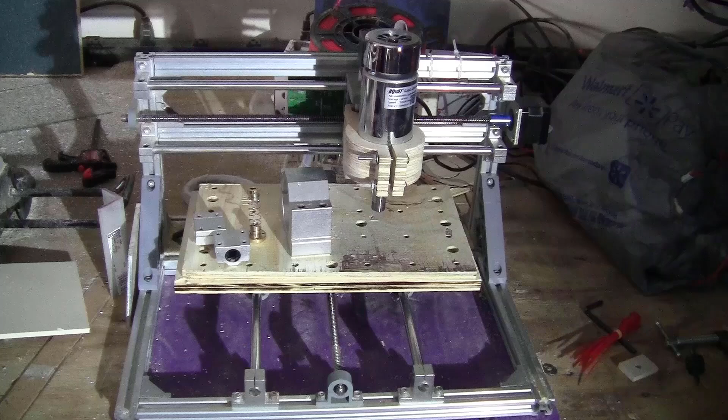Okay guys, so in my last video I showed you how to upgrade the spindle on your 3018 CNC by making this type of a holder, which you can mill out on this CNC machine itself using the original spindle. And I think that the solution is as good or even better compared to any other 3D printed solution out there. Today I will show you another way to do it.

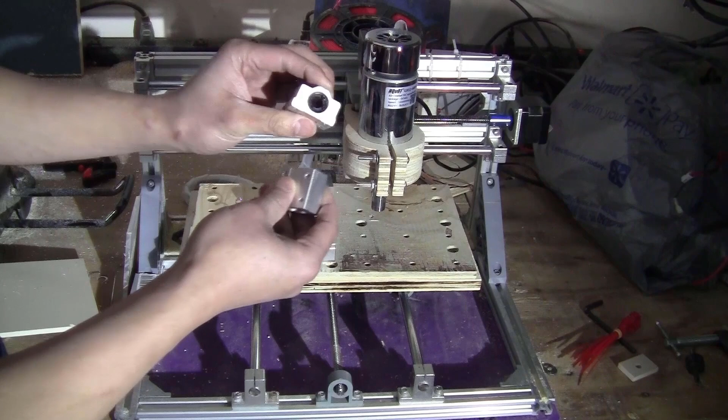It will be a lot more sturdy because everything will be made out of aluminum, but it also requires more work and also tools and materials. So what you need is just this type of spindle clamp, which comes with the spindle when you buy it. Two of these bearing blocks, SC8UU, which you will have to trim a bit later. I will show you why and how.

And this type of anti-backlash nut, T8. You will have to pay attention when you buy this type of nut for the 3018 CNC. The 3018 CNC machine uses this lead screw, which has 8mm diameter and 4mm lead. So you will have to buy the corresponding nuts for it. That is very important. If not, it doesn't fit.

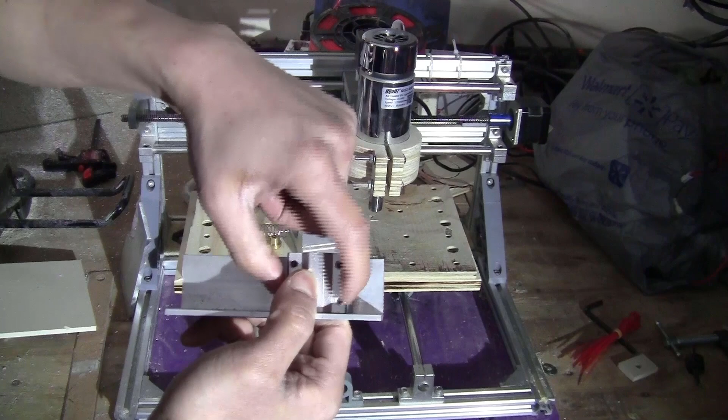And you will need also some aluminum plate, maybe 6mm thick or less. Not too thin though, because if you want it to be sturdy, keep it about 5 or 6mm. One piece of aluminum angle like this. Just make sure that the side of this is large enough to cover all the 4 holes on the linear bearing. I will show you why later.

So now let me just show you quickly my design for the setup on the computer, and I will change this back to the original spindle just to make sure that you can do it even with your original setup of the 3018 CNC machine.

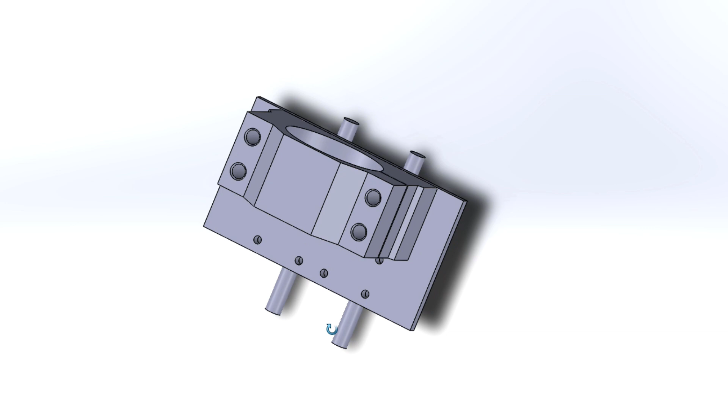Okay guys, so let's just take a quick look at the spindle holder setup. You will have the original spindle clamp here, attached on this plate, made out of aluminum, using the M6 bolt that comes with the spindle clamp. And this aluminum plate will be attached on the linear bearing block through the holes, using some M4 bolts.

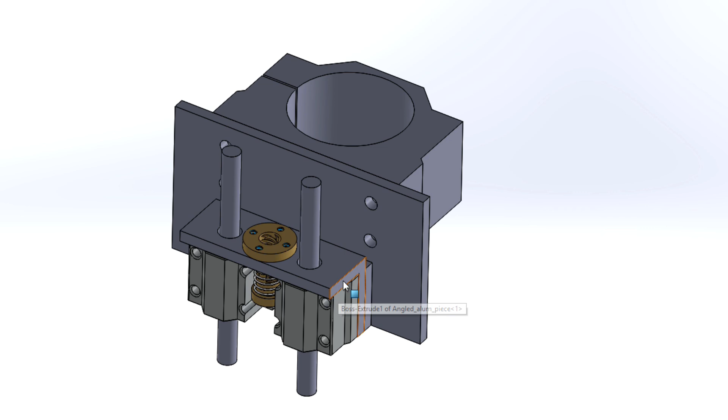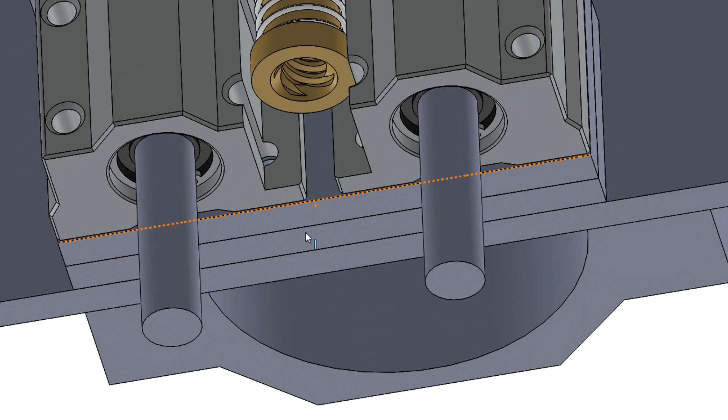And here is the angle aluminum piece that I showed you earlier. On one side you have the holes here to attach the anti-backlash nut using some M3 bolts, and on this side it will be bolted to the linear bearing blocks. And for this nut to fit inside the setup like this, I will need to trim off some part of the linear bearing block here. To do this, I'm going to use any type of saw, like a Dremel tool, angle grinder, whatever you have and feel comfortable using.

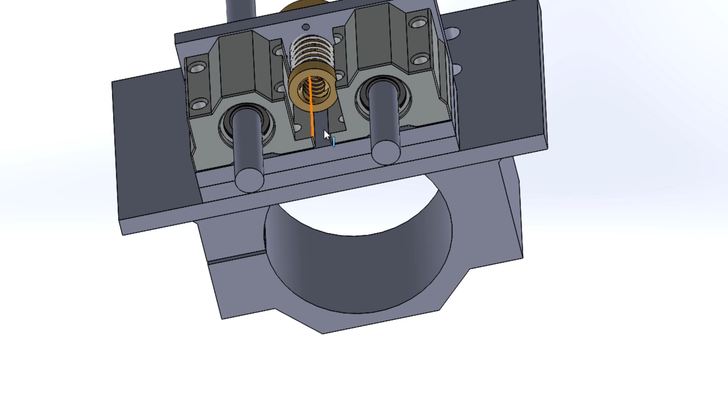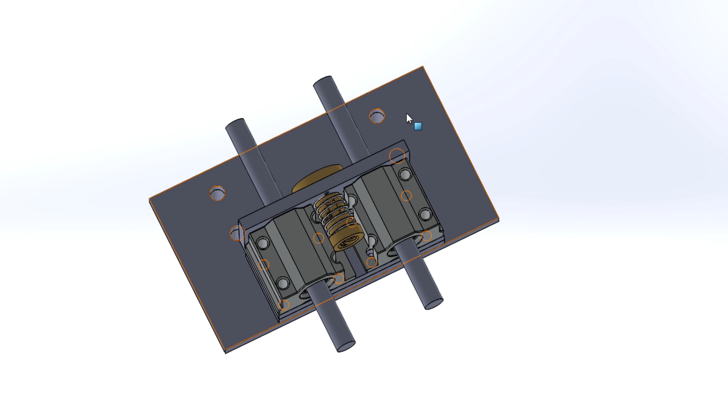And this rail here is the original rail on the Z-axis, so the space here is very limited; that's why I need to trim this off. And I won't be making the aluminum pieces on the 3018 CNC because I don't think the original spindle is powerful enough and the machine sturdy enough. So what I'm going to do is make some drill guides using plywood on the 3018 CNC, then attach them on the aluminum pieces, and then use a drill, or a drill press would be ideal, to drill the holes using the corresponding diameter drill bit. So let's just get to it.

I don't think I need to show you much on setting up the CAM because it's really easy. You only need to pre-drill all the holes with some small bit. For me, I will use a 2mm bit because the holes here need to be 2mm. So I'm going to use the same bit for all the holes, and then I'm going to use the 3mm flat end mill to cut the pieces out from the stock.

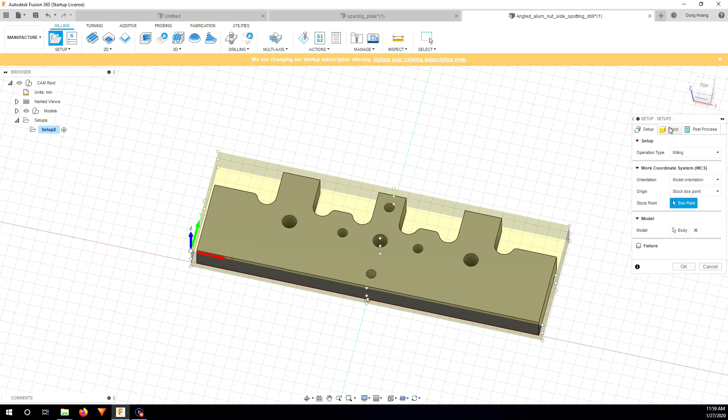Okay, so now I'm going to go to manufacture, create a setup, choose the reference point here. Stock, I'm going to put 10mm on the side and 0 on top. But I think I'm going to use 6mm thick, and here the model is only 5mm, so I put 1mm offset at the bottom and then click OK. And now just click on drill and then select the tool. Here I can choose any tool because on the machine I'm going to use the 2mm bit. So I just click on a random bit here, 3mm flat end mill.

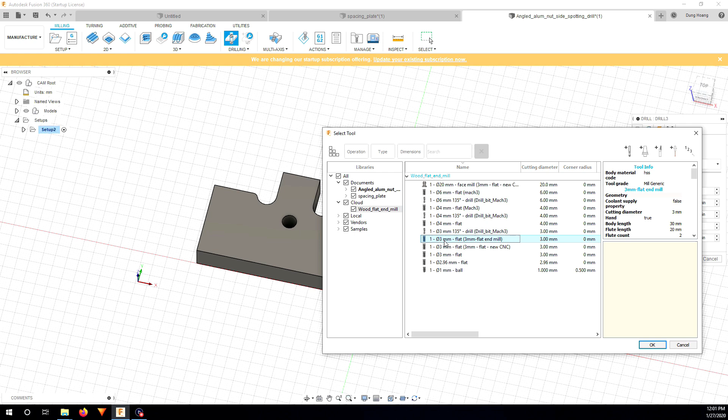Okay, and here I put probably 3000 RPM so it doesn't burn the wood. And here I put 100 plunge rate and maybe 200 retract feed rate, and disable this. And here I'm going to choose all the faces of the holes that I'm going to drill.

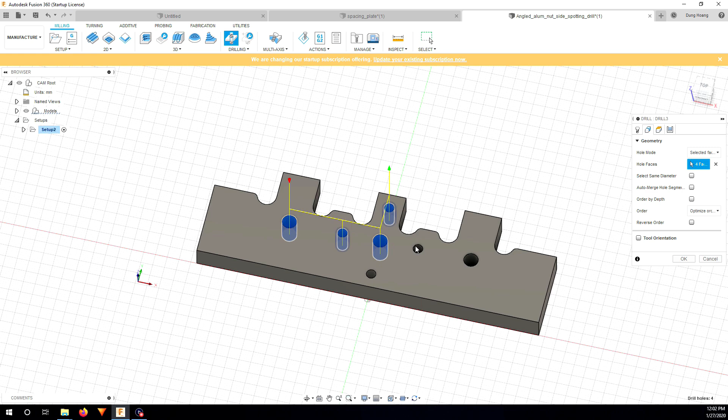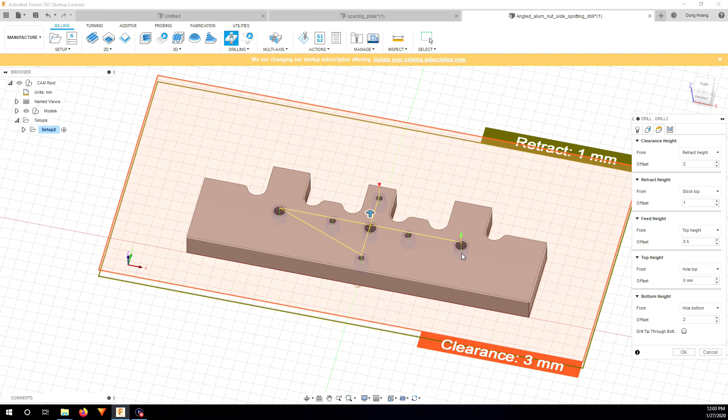Okay, and then this I put like 2, 1, 0.5. And here on the bottom height, I don't want to drill all the way through. I just want to drill a little bit, so it's kind of like spotting drill. And then later on I'm going to use the drill press to drill all the way through. So here I put probably offset about 2mm, so it's only like 3mm inside the stock. So that's it. And here, nothing, so click OK.

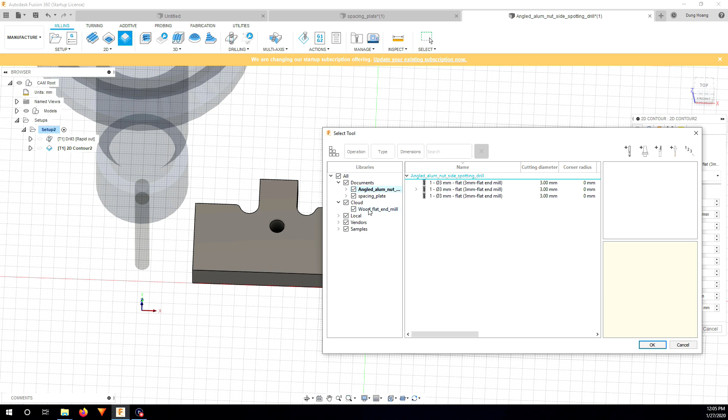So the drilling part is done. So now next step is I need to do a 2D contour to cut this piece out. So I click on 2D contour and then select the same tool. Okay, disable this. I just reduce the plunge rate a little bit. And here I choose this contour. And I'm going to use tabs. Here probably 1mm tab height.

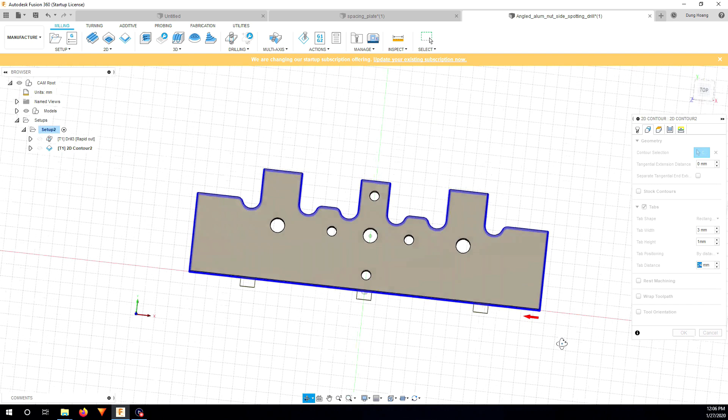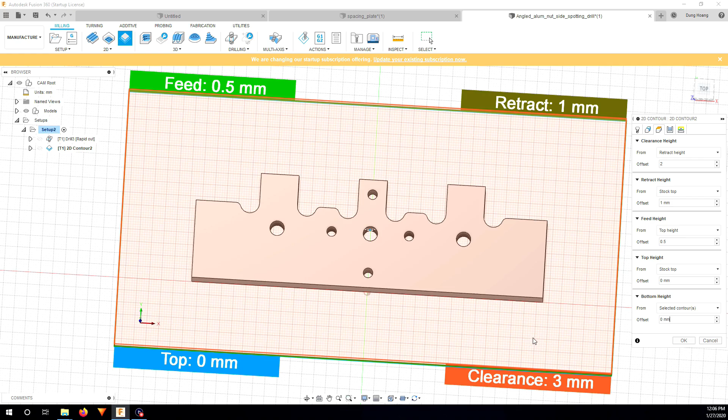And then tab distance, I want to get a bit more tabs, so I'm going to reduce this to probably 15. Okay, so here I have the 2 extra tabs on the side, so I feel a bit safer this way. And here I put like 2, 1, 0.5. And here I want to go all the way through, cut the piece out.

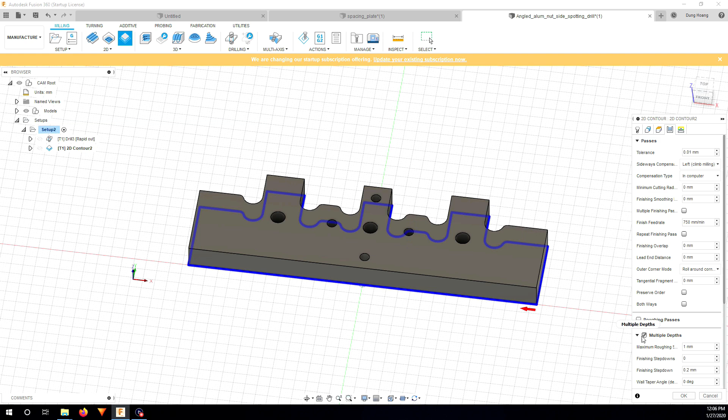So I'm just going to do stock bottom, and then offset will be minus 0.5. So we cut all the way through. Here I will do multi depth, 1mm step down should be fine. And here I always disable the lead in and lead out and click OK. Now everything looks correct to me.

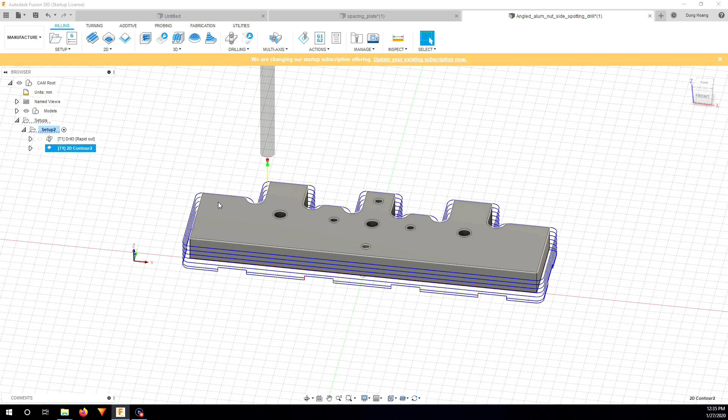So next step, just make sure you save the paths separately, because you're going to use the 2mm drill bit for this one, and you're going to use a 3mm flat end mill for this. Next step, I'm just going to show you quickly how the machine cuts these pieces.

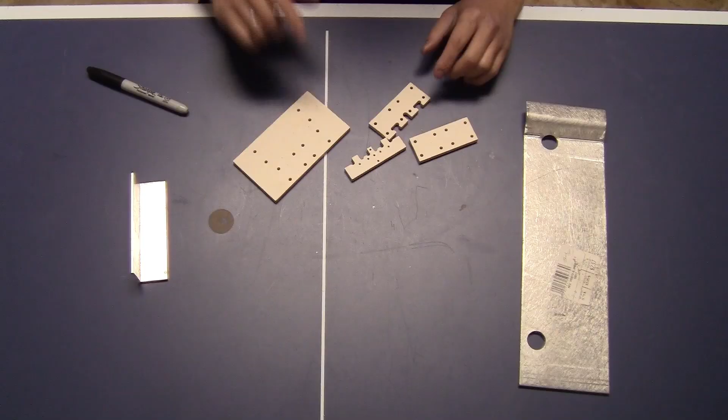Now I have all the drill guide pieces cut out here. The next step is to trim the aluminum pieces to shape and size. So first of all, on this angle aluminum, I just put this piece on here and mark where I need to cut it. That is very simple for this one. I only need a line here to cut it.

And this one I will have to cut it to size. So I'm going to trim it here and just draw a line around it. And I will make probably 3 pieces of this spacer. And this you don't need to be exact, just roughly like this. Okay, so when I trim all the aluminum pieces to size, I will show you how I drill the holes.

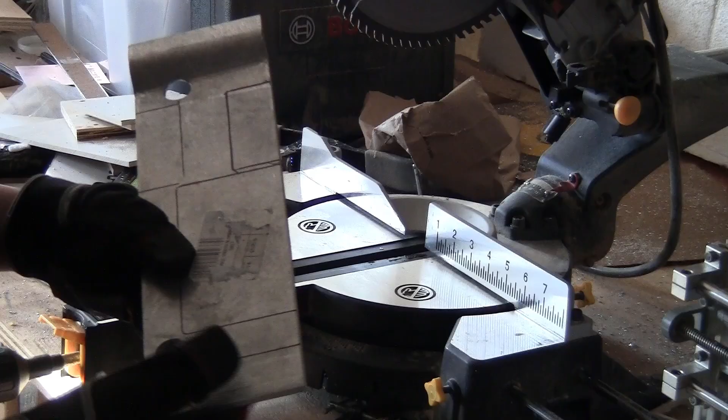Okay, so now to trim all these pieces of aluminum, I'm just going to use my chop saw. Just make sure you take all the safety precautions when you're doing this.

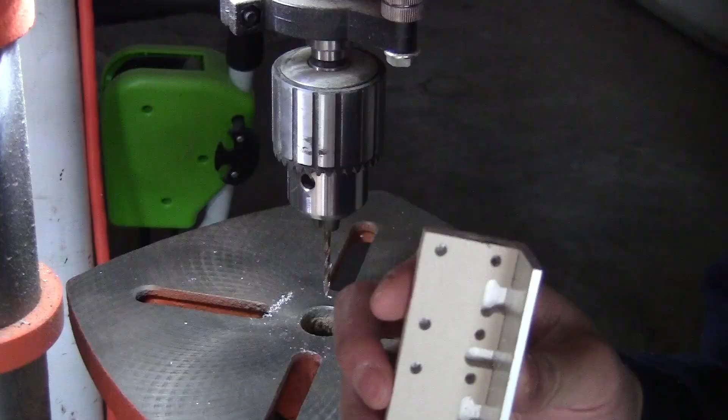Okay, so now for the pilot drilling part, the most difficult one is probably the angle aluminum piece. So what I do is I take the drill guide for the bearing side here. I just glue it on here using the glue gun again. So now it's really fixed on this piece and it doesn't move when I do the drilling. So that's how I'm going to do some spot drilling on this.

I don't need to drill all the way through. I only just drill in a little bit so I have the mark, and then I'm going to take this piece out and then drill again all the way through. And after I am done with this piece, I just slide this piece in here and then glue it on here also, because I already designed all the slots here, so it just snaps right in and it stays in position, and then you have the position of the hole exactly at the place that you need it to be.

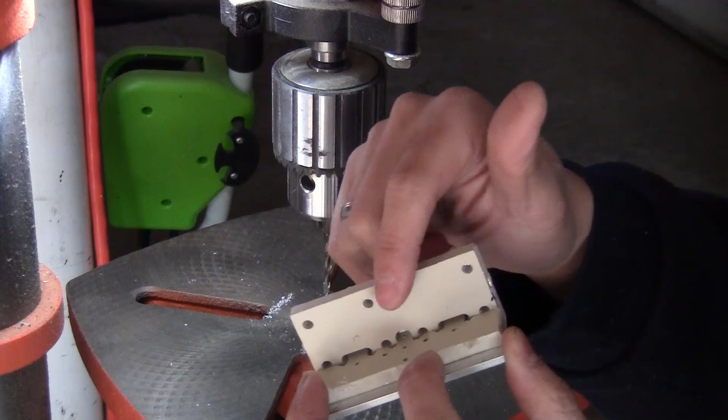So now I'm just going to run the drill. For this piece I use the 3mm drill bit. For the other one I use the 2mm drill bit. Okay, so now I glue this piece on here. I'm just going to cut and take this piece out.

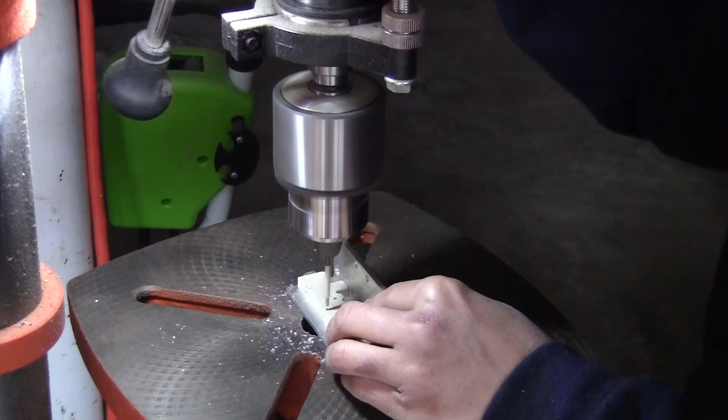Okay, so now I have all the holes here pre-drilled, spotting drill. I'm just going to use the bit that I need at the size, to drill all the way through. For example, these 4 holes here will be 2mm, and then these 3 holes will be 10mm or 10.5, and those are 4mm. So I just need to take the corresponding drill bit and then drill all the way through the piece.

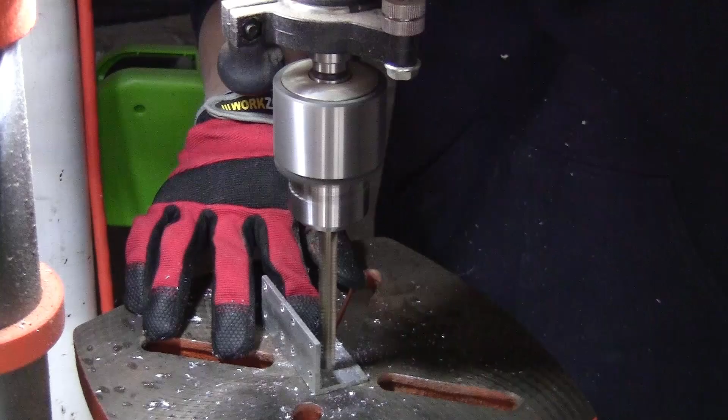Okay, so the next step, I'm just going to make M3 thread on the 2mm hole here. Okay, so now the holes are threaded. Let me just test if I can install the nuts on this.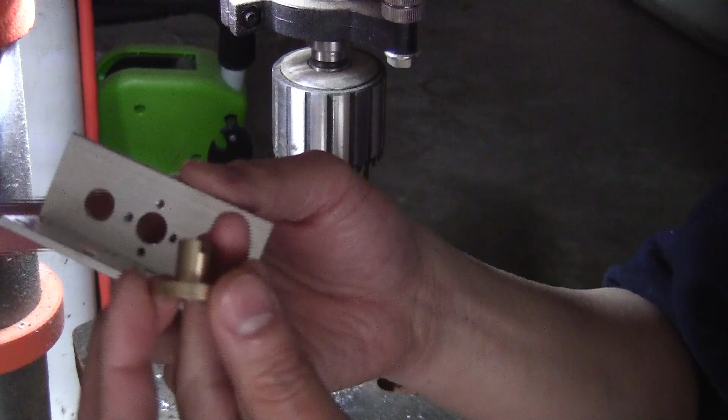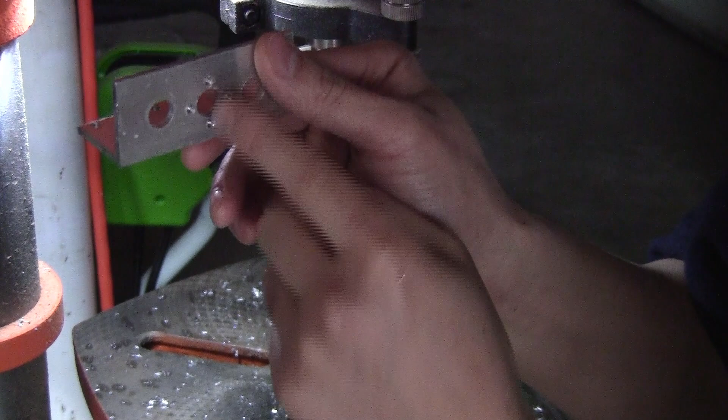Okay, so I have the nuts here, and it actually doesn't really slide in here because I think this hole needs to be enlarged a little bit. Probably 10.5mm would be good. But all the small holes here are lined up perfectly, so that's the good news. So I'm just going to use my Dremel tools and enlarge this a little bit until this slides through.

But as you can see, making the hole at just the right position using the drill guide you cut with your CNC machine is really easy. So I'm just going to finish all the other parts.

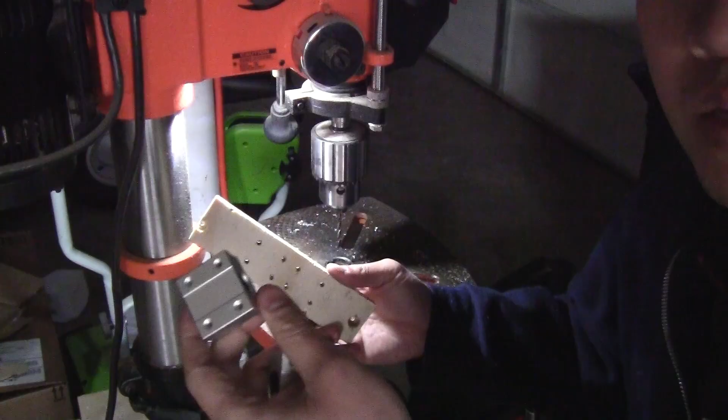The next part is to trim off some piece of this bearing block. So what I need to do is trim in here about 3.5mm and leave about 3.5mm on top. So I'm just going to take the marker and mark all the areas that I need to trim off, and then I attach them here on this block, so I can have more room to handle the bearing block, and especially when I cut it with the saw, I don't cut off my finger.

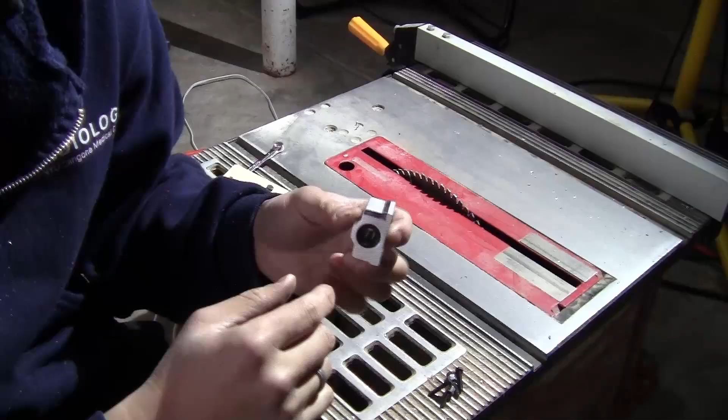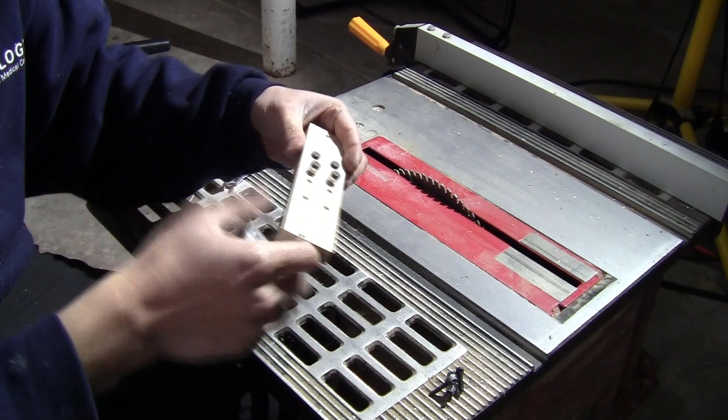Okay guys, so I made the mark on the bearing on all the sides here, just the place I need to chop it off. So to do this, I prefer to use the table saw because I can adjust the blade height to the line here, and then I can just keep sliding back and forth until I chop it to this line. And I'm going to use this plate to hold the bearing so I have more space. So as I told you before, just not to chop off my fingers.

I just use some M4 bolts, 20mm length, to fix this bearing under this plate, the inner part here where I'm going to chop it off. I don't want to use really long bolts because you can cut the bolt and it's steel, so it would be hard to cut. So that's why I put some nuts here, just to space it up. So you only have about 2mm biting into the bearing thread, so it won't be cut.

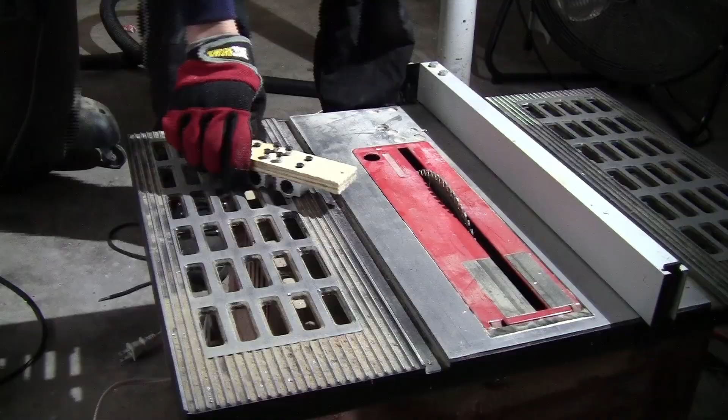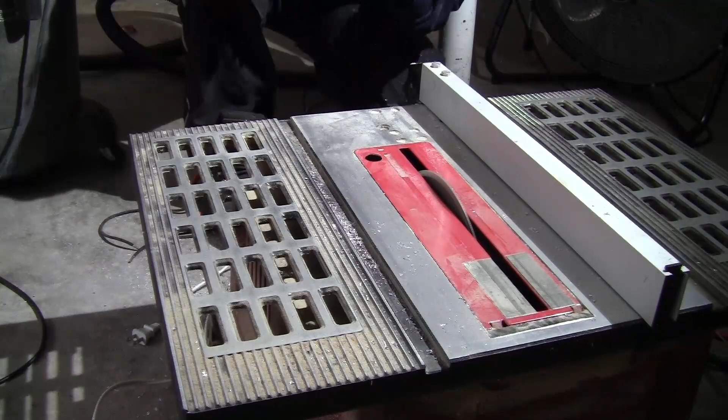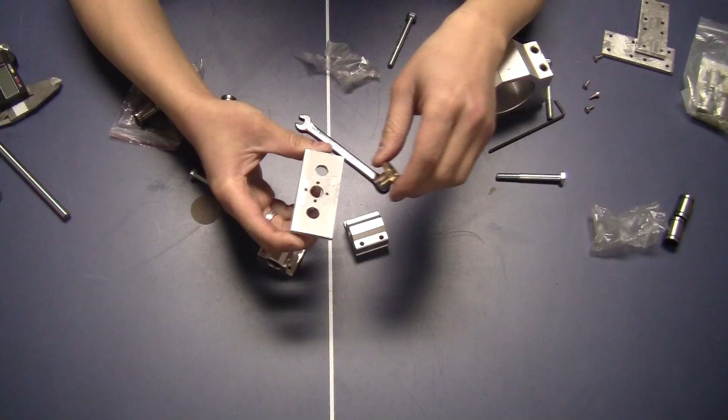So as you can see, the first cut, as I said, is right at the place that I need to cut. Now I only need to trim this part off, and this will be very easy. Okay, so now I cut off the parts that I need to trim. So now I only need to clean it up a little bit using my Dremel tool. Okay guys, so I trimmed this piece, so it fits nicely now.

And also on this plate, to hold the spindle clamp, instead of drilling the 6mm hole for the bolt to go through, I decided to only drill a 5mm hole and make some M6 thread in it, so instead of using the nut at the back, I just bolt the spindle clamp directly on this plate.

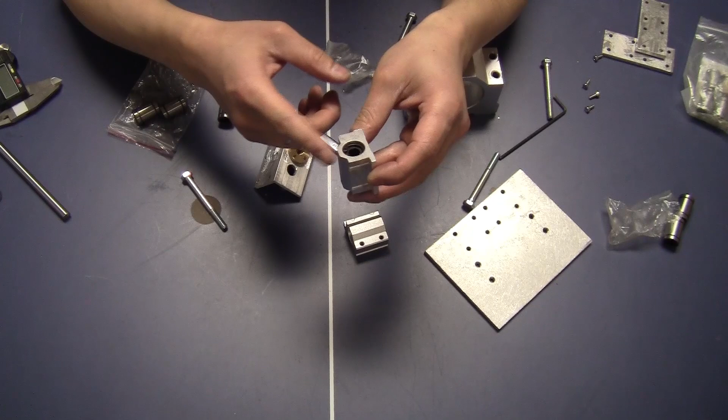Now I ran into a problem. I tested the tolerance of this bearing block with an M8 shaft, and they are really loose. You can move in almost any direction. You can feel the imprecision of the bearing block. So I try to take one out here.

So you have two problems. The first problem is the bearing slides in here very easily, and it's also kind of loose. So it already has imprecision in this setup. And then the other one is when the shaft goes in here, it has its own movement on the shaft. So that's the second imprecision.

So the first one is easy to fix. I'm just going to drill some holes here and make some M3 or M4 thread on this. So I can slide the bearing inside and use some set screws to set them down so they won't move inside anymore. So that part can be fixed.

And this part, on the shaft here, I cannot really fix because it depends on what type of bearing you buy. So I tried different brands, like this one and this one. They look almost the same, but they come from different suppliers. But the imprecision is still there. It's kind of loose on the shaft, so I don't think I can use those.

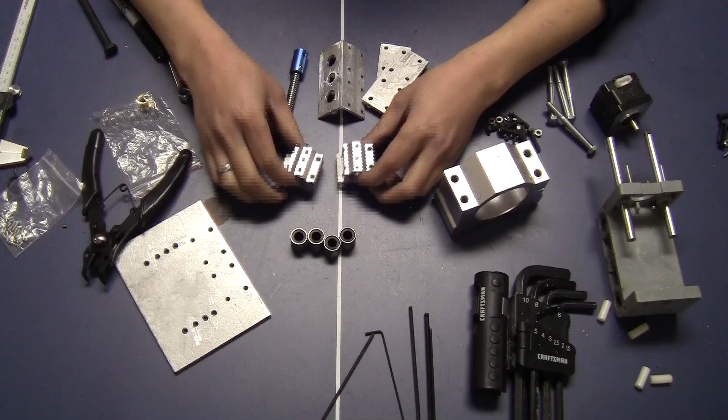Okay guys, so I just got the hole drilled and threaded on the bearing block here. I just dismounted the Z-axis and I got the original bearing here. So what I'm going to do is, well, you have to make sure that they line up like this and push one of the bearings inside, to the edge of this. You might need to pound it in a little bit using the hammer or whatever. So all the way to the edge, and then the other one on the other side.

So once you push it in, it's going to be like this. This side is kind of stuck out a little bit, but that's fine. So next step, just use some of the M3, well, whatever hole you thread it with. For me it's an M3, so I use some M3 set screws and I just lock it in so it doesn't slide out. Okay, so now it's really solid. So let's just do that on both.

Okay, so now the nut is installed. Next step, I'm just going to stack this plate, this one. You will need two of these spacing plates. It's about 10mm, and then you stack this one and this like this, and then bolt them down to the bearing block like this. Just remember, this side at the bottom, this goes up here. So let's just do that quickly.

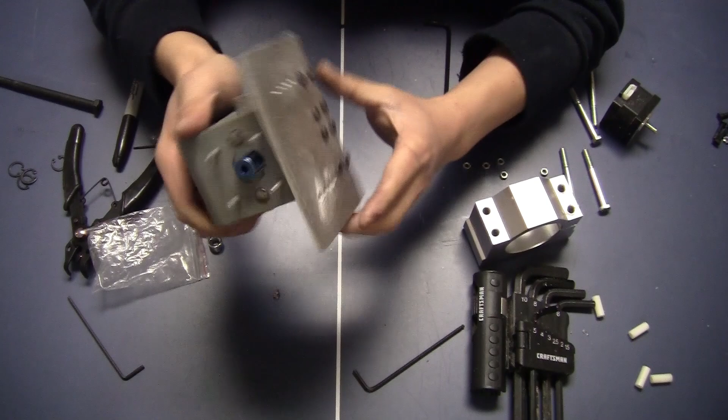Yeah, the rail should slide right in here. Shouldn't have any kind of problem getting stuck or anything. Okay, so now you have the Z-axis installed here. It should be sliding up and down normally, no problem here. So next step, I'm going to reinstall the stepper motor and install the spindle clamp. Okay, so now I have the stepper motor installed, this plate back on. It's really sturdy and solid. I don't feel any type of loose movement here.

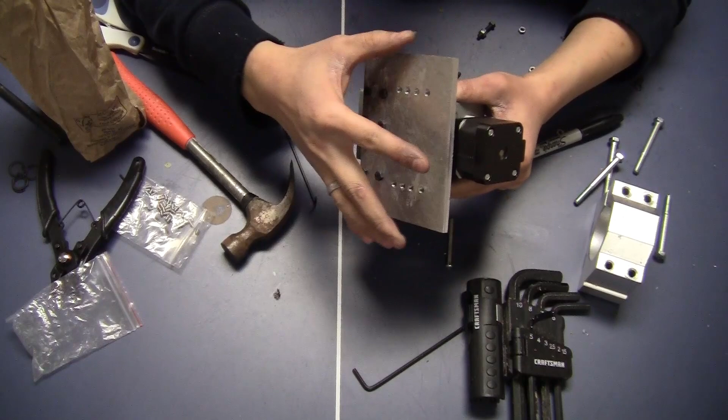So you should be able to test it, make it move by turning the lead screw with your finger here, because those stepper motors are pretty weak. So if you cannot really move it with your finger, that means it's not really smooth, and it might lock up, the stepper motor might lose steps. So just test it quickly like that.

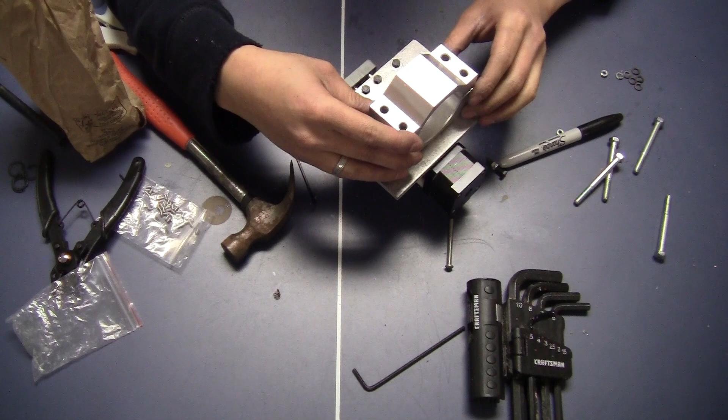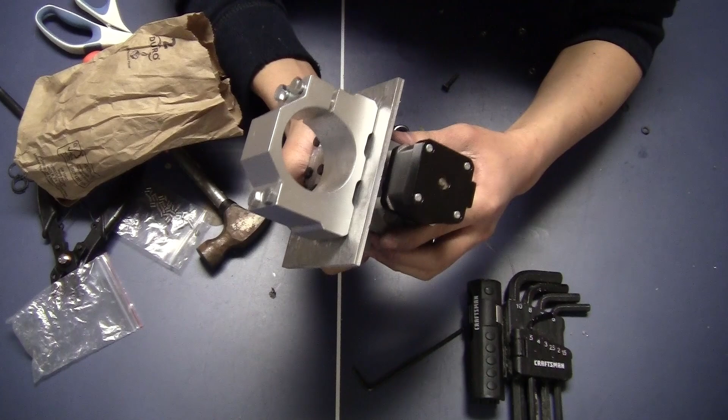So now I'm just going to install the spindle clamp here. I'm going to use some M6 bolts, 60mm length. So just slide them in. I'm going to tighten this side first, where it's not opened. This side I can just tighten lightly, just let it loose. Okay, so now I have this ready, and let me just install it on the machine and show you if it moves smoothly or not.

Okay guys, so I just installed it on the machine, and here's what it looks like. And you can see here that the motor is still working as normal. Let's move it up and down to see how it goes. Okay, so as you can see, it's still moving up and down very smoothly, even though it appears to be very heavy because it's made out of aluminum, but apparently it's not a problem.

This is probably not the easiest way to upgrade, because you will need more tools, materials, and also spend some time to work on those pieces, but it will be worth it because this is very sturdy. So it will be up to you to choose between this setup or the previous setup. If you decide to do this one, even though it's a bit more difficult, it will be totally worth it because it's very sturdy.